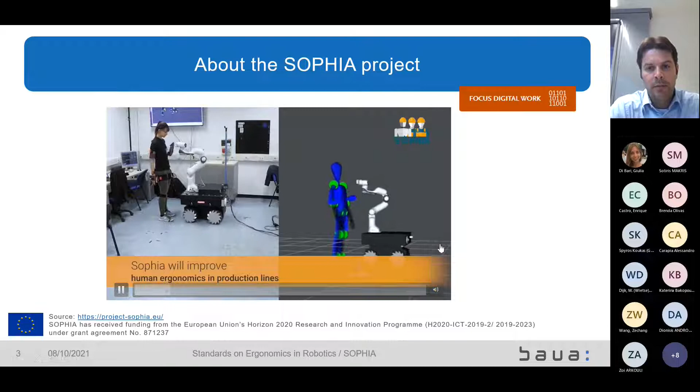I'm not sure, Giulia, can you also hear the sound or not? Yes, we can hear the music.

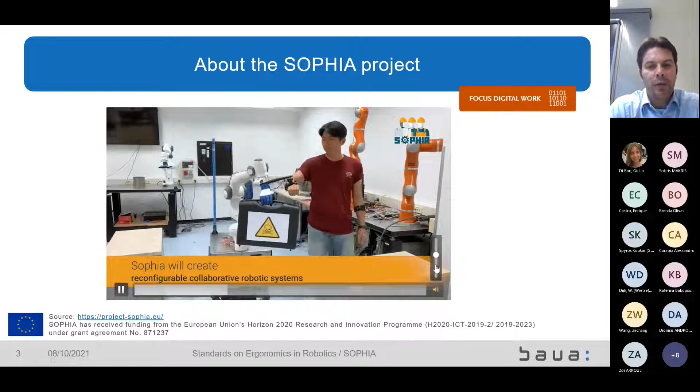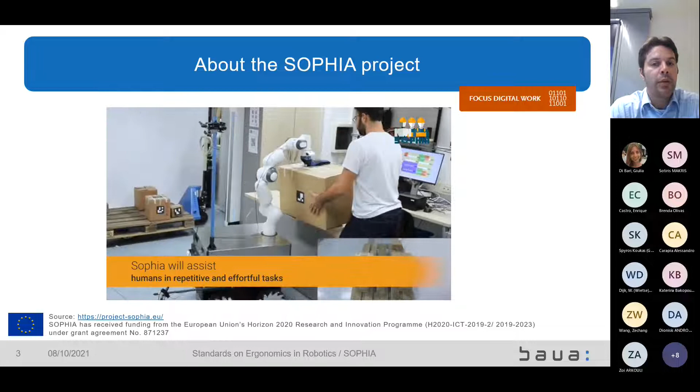So basically what you can see here, we do have collaborative robots - we have collaboration, working at the same time on the workpiece, but also cooperation, not working on the same workpiece at the same time. Here you see one focus of the project. The other focus of the project is on developing exoskeletons, which is something we have started now with several use cases, from the human-robot interaction part.

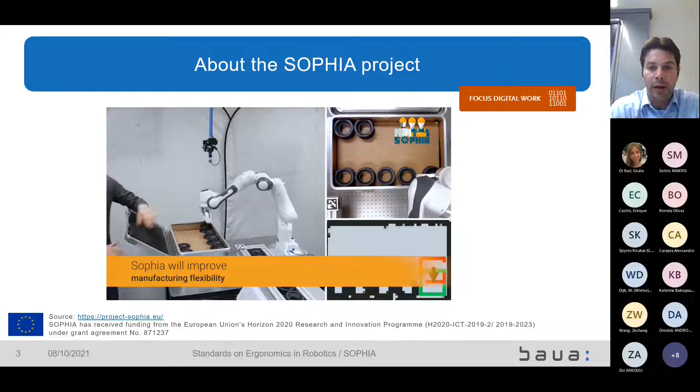As you can see, different aspects we are working on in this field, quite similar to what you are doing in your project. One work package, as you can see here, looks at whether there's any need for updates to standards in the field of ergonomics or workplace safety. So that's just the overview slide.

Who's involved? Here you see all the partners: we have the IIT, the University of Pisa, the University of Brussels, INAIL in Italy, the University of Twente and BAuA as research institutions, and DIN, the German Standardization Institute, for questions of standards. We also have four companies involved: Volkswagen, Hankamp, and Hydria.

They are the manufacturing use cases, and also the company IMK, who's doing human modeling simulation in this field.

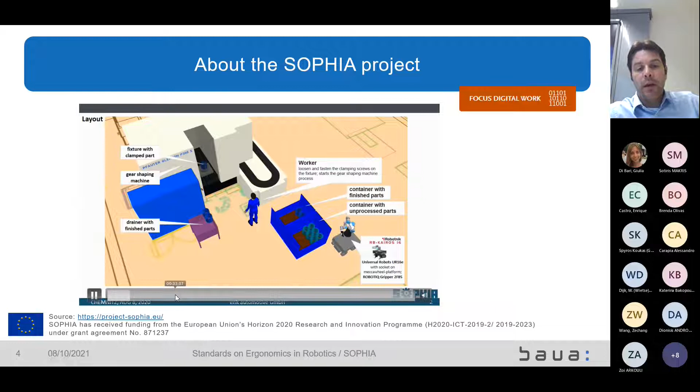What I also brought you is briefly 3 use cases we are working on currently. These are not the only use cases, but just to give you an impression of the systems we are using. As you can see in this simulation, we have a manufacturing environment, a mobile robotic platform, and the classic setting of cooperation.

Basically, the robot is moving the heavy parts to the machine and putting the parts into the machine, and the human is more about adjusting the machine, starting the machine, doing quality inspection, and not doing the heavy lifting of the parts anymore. So this is one use case.

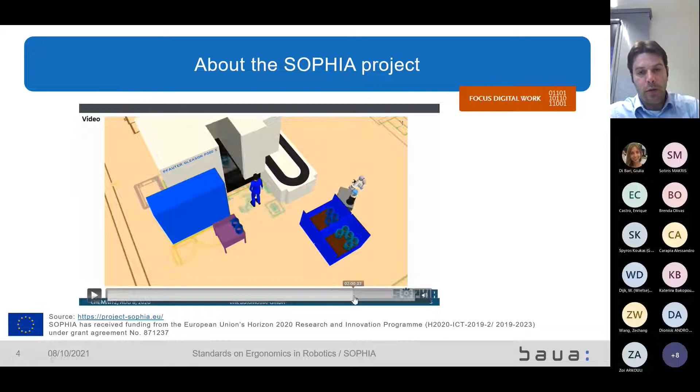What we always do within the project or within the use cases, in the end, is a comparison if using this system helps from an ergonomic point of view, and of course also from a productivity point of view. I don't want to show you the numbers, but if you're interested, I think we uploaded the video to YouTube, so you can take a look at that a little later.

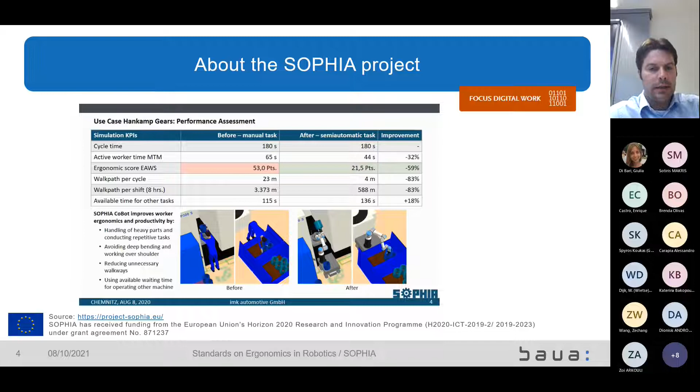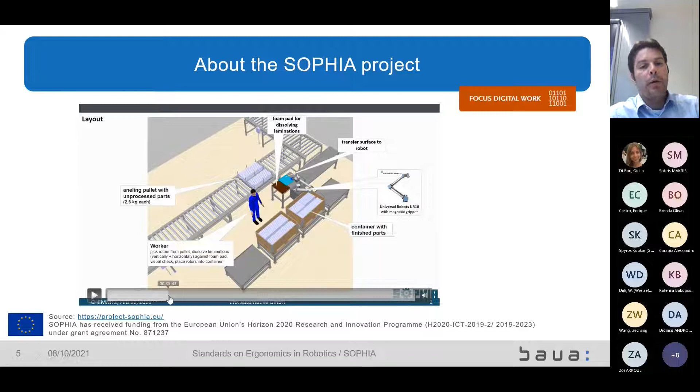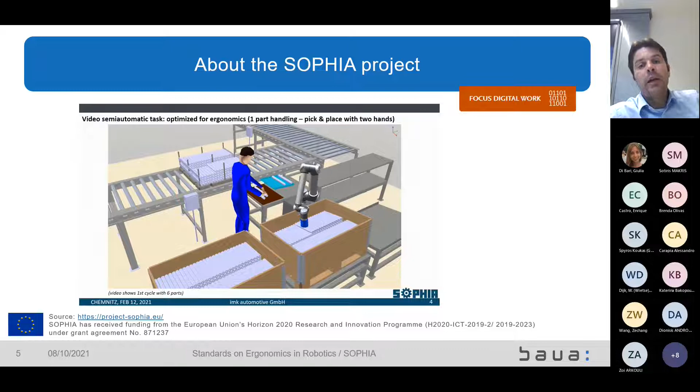One other use case we have here at Hydria - let me just mute that. At Hydria, this is not a mobile platform. This is the process before the human-robot interaction part, and then we have the second version where the human is working together in this hybrid robot system, again not in a collaborative mode, but in a cooperative mode. What I also said before, here we do have the comparison before and after, and what changed due to the implementation of the robotic system.

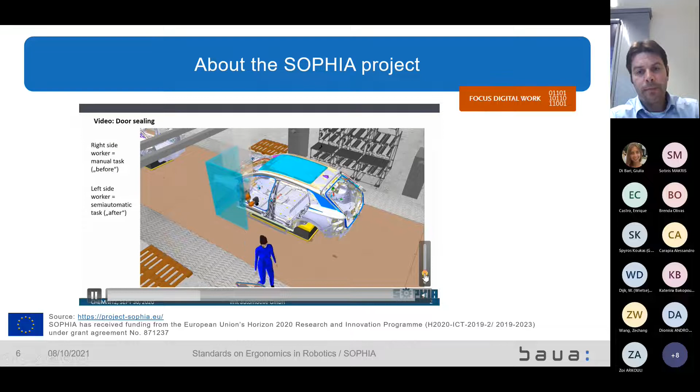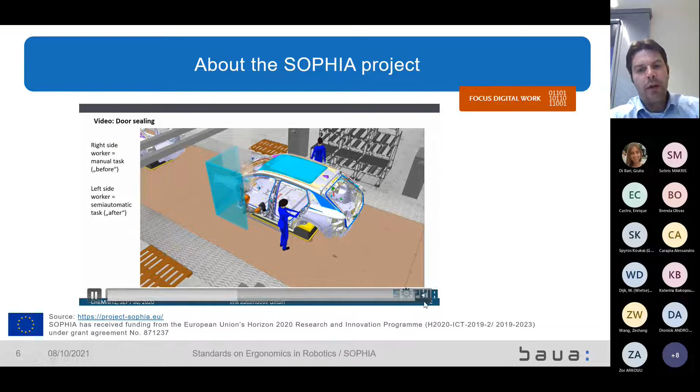We are not only working on robotic systems, we are also working on developing exoskeletons, and on developing methodologies to foster this human-robot interaction. So also for the robotic systems and the exoskeletons, to anticipate the human behavior and support him in a very fluent way, without stopping in the movements, but predicting some of the expectations and movements, so that we have a very smooth collaboration with the mobile robotic system or with the exoskeleton that is used.

So that just to give you an idea about the SOPHIA project.

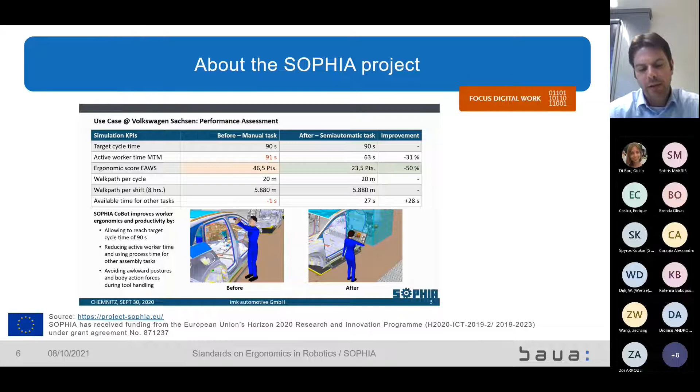Within this project, for us it was also important to take a look at what kind of standards we have, what kind of standards we need to consider, and then also the question of whether there is a need to update the systems and the standards, and what is the update need. I would like to talk first about the standards that are out there on ergonomics in robotics.

Basically what we can say is there are almost no specific human-robot interaction standards on ergonomics, but there are some that are still valid. They are not just limited to robotic systems, but also to machinery in general.

Let me just quickly take a look here, because what I didn't bring you today, since you already had the workshop: today I'm not talking about the safety requirement standards, the ISO 10218 part 1 and part 2. I'm not going to talk about the safety requirements for personal care robots, the ISO 13482. I'm not talking about the ISO specification 15066 on collaborative robotic devices. These are mainly safety standards, so that's why I'm not talking about them in my presentation.

What I want to focus on is specific ergonomic standards, and here you see from my point of view, some standards we have identified, among others, for the SOPHIA project.

Of course, we have to talk about the European and international standard on ergonomic principles in the design of work systems, because these are general principles to follow when you design a work system, no matter if you're using a robot or not. These are very comprehensive and very broad recommendations, but this is something to follow.

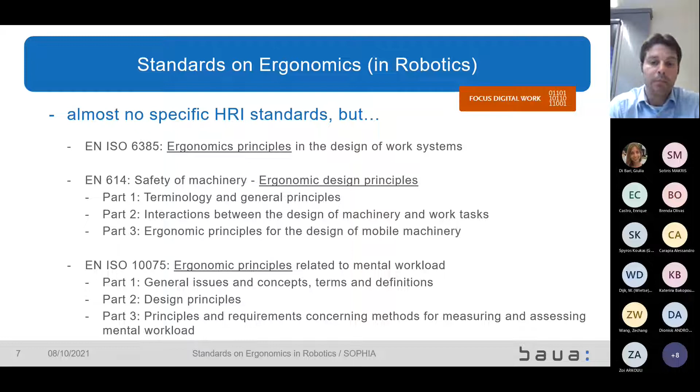What's also important is ISO 10075, the ergonomic principles related to mental workload. There we find design principles and principles on how to measure that - do I have repetitive movements, is that straining, do I have information overload when working with different systems? This might also be relevant if you design a human-robot interaction system.

It gets a little tricky. I don't know if in ROSSINI you also develop exoskeletons, because if you design systems with a robotic system, if it's in the cooperation or collaboration mode, or if it's supporting the lifting, you might still be able to use these kinds of standards for your evaluation. But if you have exoskeletons, it gets really tricky because the exoskeleton gets attached to a human body, and most of the systems we currently use to do physical ergonomic assessment weren't created to be used together with exoskeletons.

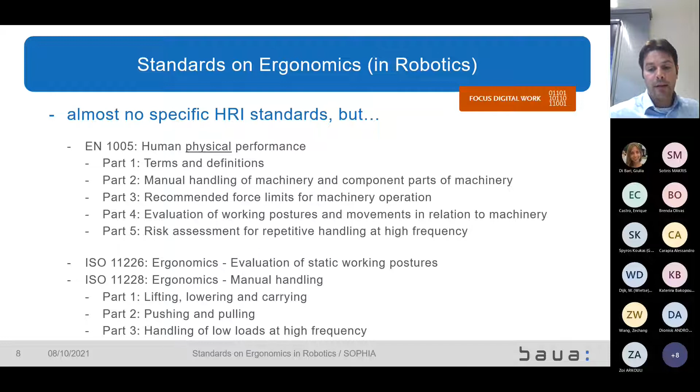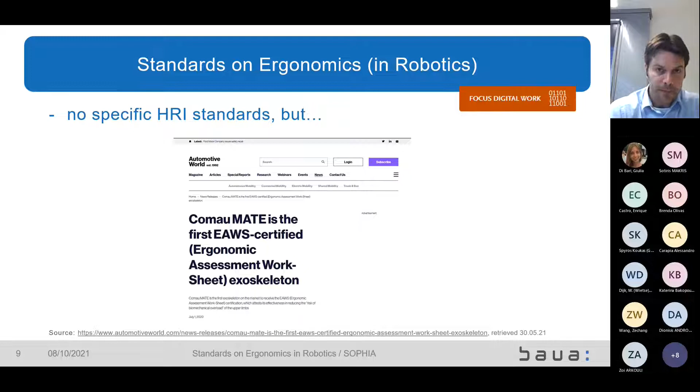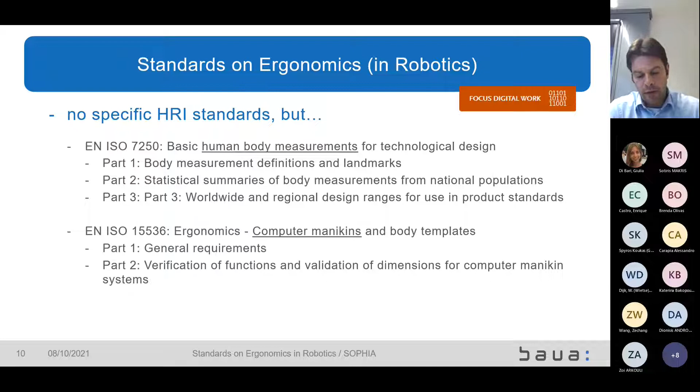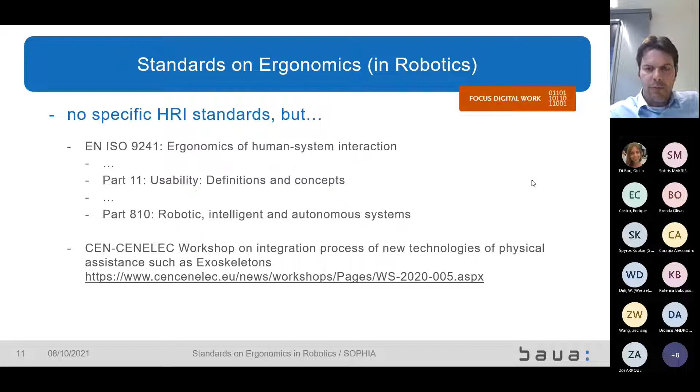Before I come to the end, I also brought an example of how we use the ISO 9241 Part 11 standard within SOPHIA, because here you see the different dialogue principles for interaction with the technical system. Something like controllability, for example, so that the human is in control and can control every movement of the machine. Also very important is conformity to user expectations.

What we've done here is for the three use cases I presented earlier, we asked the users in advance what they expect from the system, what is very important to them. Of course, it's always difficult to give all dialogue principles the same priority, and to see what to focus your attention on a little more—although that doesn't mean you can forget about the other ones—but still here you can see slight differences.

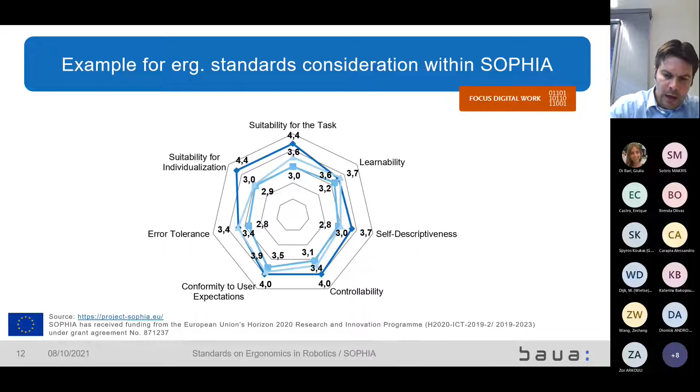Two last slides I brought. If you want to participate in standardization, or want a link to the committees, here I brought the link to the committees in ergonomics. Here you see the different committees—on general ergonomics, and on the physical part, anthropometry and biomechanics.

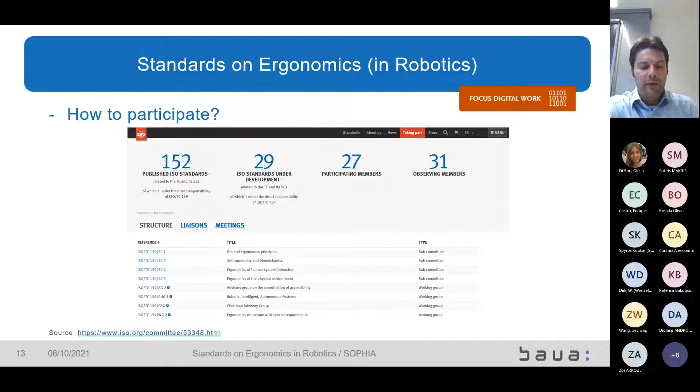Especially one on human-system interaction. So if you'd like to participate, there you'll find more information at the ISO level, next to the national levels you always have in your countries.

My last slide is, as Giulia also said, I'm with the International Ergonomics Association. Currently I'm chair of the Technical Committee on Human Factors in Robotics. Right now it's basically a LinkedIn group, so if you'd like to connect with other people in the field of human factors in robotics, feel free to go to LinkedIn and I'll add you to the group.

We're trying to foster exchange with other institutes like IEEE, the Human Factors and Ergonomics Societies, and ISO, basically to create a group of people strongly engaged in this field. This year we supported the triennial Congress of the IEA by delivering a human factors in robotics track, and we're working closely with IEEE and ARSO, the Conference on Advanced Robotics and its Social Impacts. I think it will be next year in the US, and we're trying to get it to Europe in 2023.

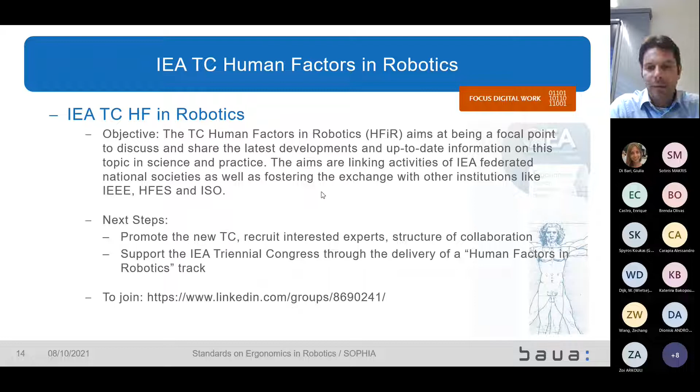So if that's of interest, I kindly invite you to join the group. With that said, I didn't use the full 30 minutes, so I made up some time. I hope it wasn't too fast, and I hope it was a little interesting. Thank you for your kind attention, and happy to take questions now or later. Thank you very much.

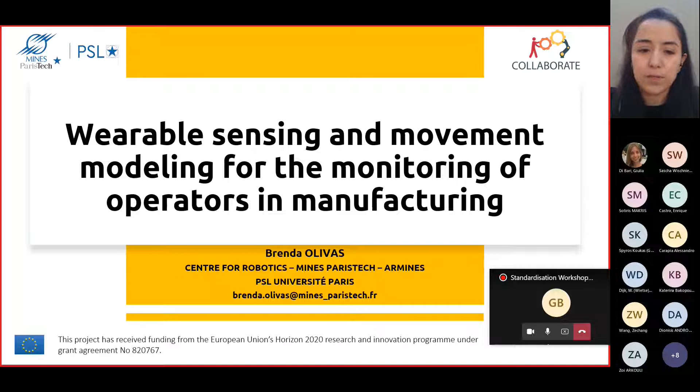Here is an outline that I prepared. First, I will give you some introduction on how we based our hypothesis, how we gathered the data collection for the Collaborate project, the methodology, experiments, an ergonomic analysis platform we developed where we implemented our data-driven framework for this project, and also some conclusions and future work.

First of all, an introduction about what work-related musculoskeletal disorders are. We try to follow specific standard methods. We have found that workers can assume awkward postures, exert high forces, and sometimes be exposed to vibration. In the long term, this can develop into musculoskeletal disorders.

So from our point of view, we wanted to track these risk factors in the workers by using sensors, in our case wearable sensors, or also computer vision, to keep track of these workers and be able to identify these problems.

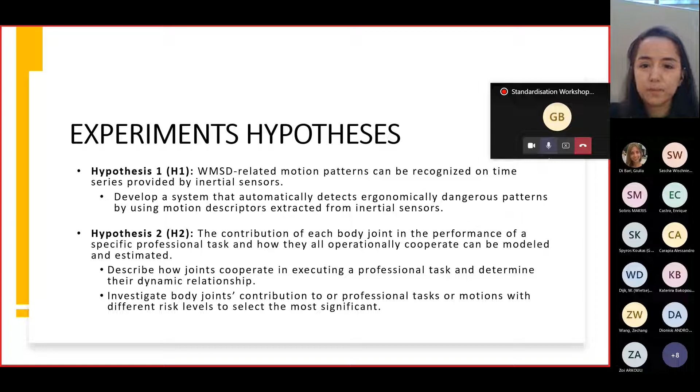We followed a common, simple methodology. First, data collection: we recorded data from different partners in the Collaborate Project, and I'll show you the data sets. We did statistical analysis to determine which motion descriptors to use, such as joint angles, joint positions, kinematics, or torques. We also focused on reducing the quantity of information needed, because to track workers in a factory, we require minimal sensors placed on the worker so as not to be invasive, or to possibly use cameras instead.

So we had to research which technology is most appropriate to record humans. The next step is developing a method for human motion modeling, then applying this method for ergonomic analysis - can we recognize dangerous patterns in the modeled data, or forecast what the person is going to do? If a predicted movement could be considered dangerous, we can define confidence intervals for safe ranges, so that when a person performs a movement that falls into a risky posture or action, we can do risk prevention. We want to implement all this analysis in an ergonomic feedback module usable in companies and factories, in different types of scenarios.

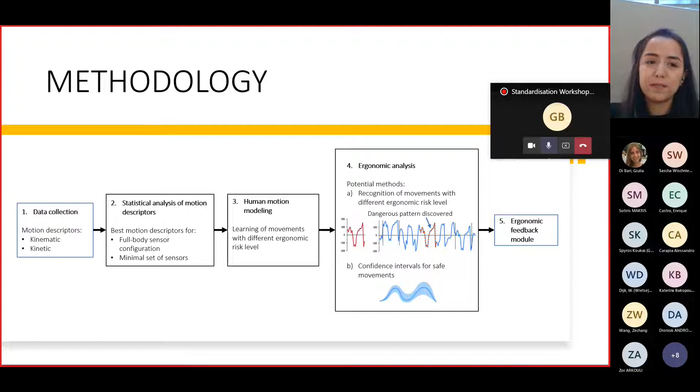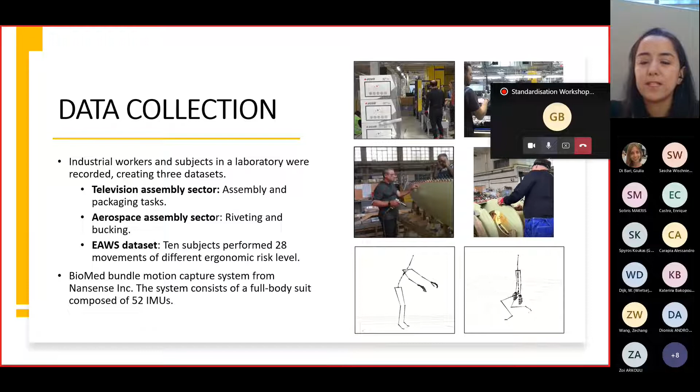To start, we did data collection. For Collaborate, we recorded data from the television assembly sector and the aerospace assembly sector, and also created our own data set where 10 subjects performed 28 different movements at different ergonomic risk levels. This risk level was computed based on the ergonomic assessment worksheet mentioned previously, because it's straightforward to follow and considers how different postures of the legs or body parts affect performance and increase risk and strain.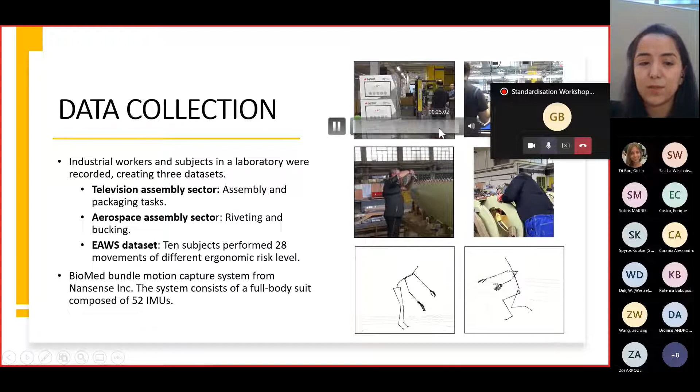For these recordings, we used motion capture technology from Nansense, a model called BioMed bundle, which is a suit. For example, in the first image, the person carrying TVs is wearing an inertial suit with 52 sensors, and we recorded the different activities of these workers to track their movements.

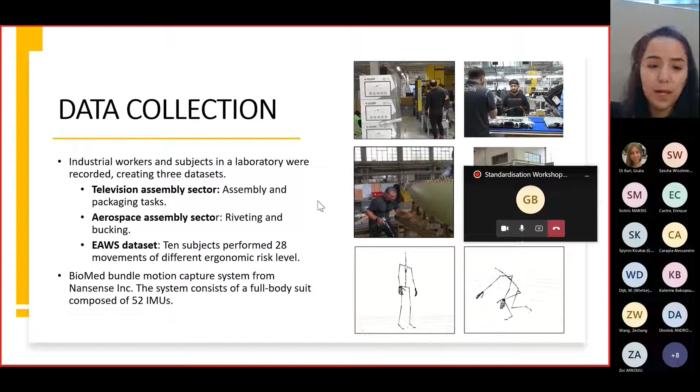For this experiment, I'll present 3 experiments quickly about what we've done so far to extract information. Initially, we wanted to identify which sensors tell us more about the movements we're tracking. So we did principal component analysis and statistical methods to estimate which joints from the whole suit could be most meaningful to monitor in order to estimate the level of ergonomic risk of the dangerous patterns workers perform.

We did component analysis, and from the 52 sensors tracked on the person, we estimated that only 4 sensors could be useful to identify between the different movements performed during a work shift, and also useful to track the postures of the person, allowing us to estimate ergonomic risk according to the posture and movement being performed. In our next experiments, we tried to reduce the sensors further, using only sensors placed on the hips and the right forearm of the person.

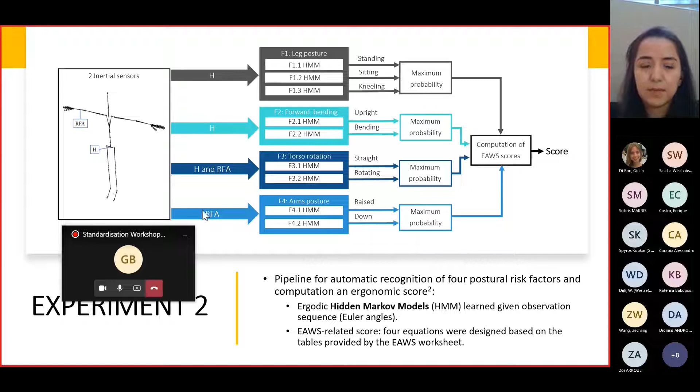We have done this particular experiment for TV assembly. In this data set, these methods have been used. For example, in this video you see at the top right, we tracked and decided to have a collaborator move this person over here, because we estimated it was riskier for him to perform that posture than for the person who is drilling.

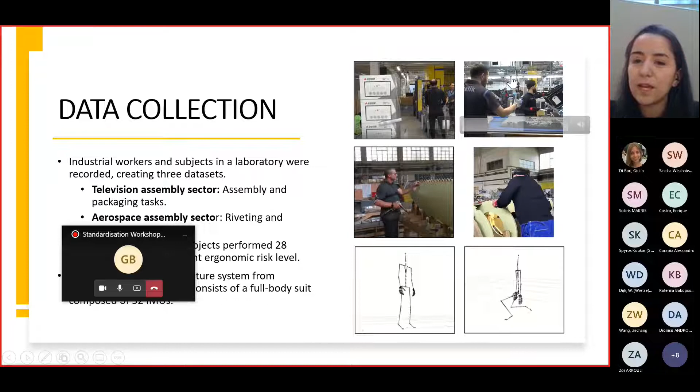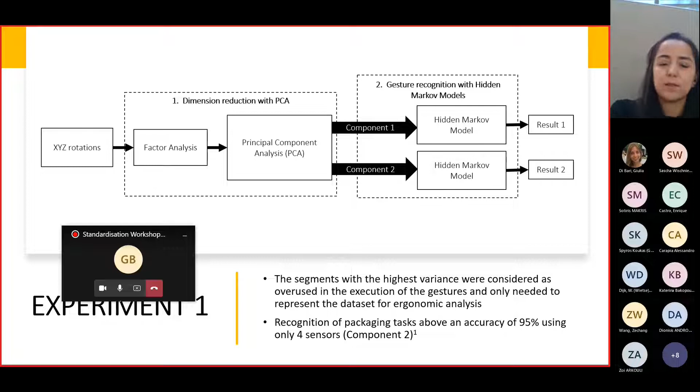With this framework we can estimate who has the highest risk or performs the most awkward postures or most dangerous movements, and who should maybe be helped by a robot, or removed entirely from grabbing boards and have a robot do that instead, so the robot can help the person doing the drilling. With this framework we wanted to track which parts of the whole task are the most dangerous.

Our next work is about risk prevention, or forecasting of human movements. In experiment 3, one of our hypotheses was to estimate the contribution of different body joints and also do some risk prevention. We developed a system, our framework, called the gesture operational model. This is a set of simultaneous equations we use to forecast the future posture of a person during a specific activity.

Why did we want to do that? With these equations we can forecast what the person is going to do in the next second or two seconds, and then estimate, according to his previous movements, whether he is later going to assume a very awkward posture or a very uncomfortable movement, according to what the model forecasts.

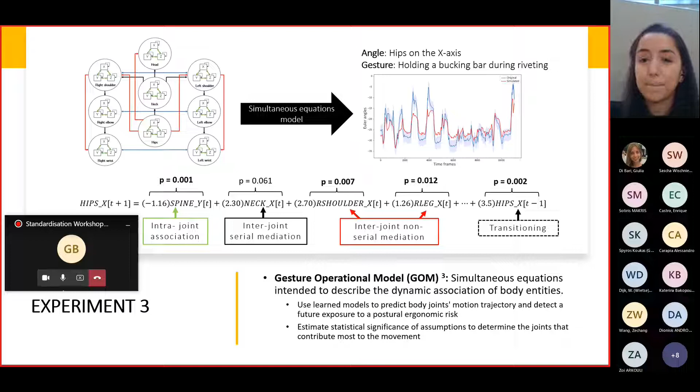With the help of this model, we can also estimate which joints are the most important in a particular movement. For example, if the person is moving his hips a lot, our model, according to statistical analysis, can help us estimate that the hips move the most in these particular actions. So there is a necessity to help this person not perform very repetitive hip actions, because long term this could develop musculoskeletal disorders.

All these methods that I have explained for risk prevention and forecasting human motion, we planned to implement on an ergonomic analysis platform so that ergonomists or managers could use it.

Firstly, we created a very simple application where we applied, for example, the Rapid Upper Limb Assessment (RULA), which measures ergonomic risks according to upper body posture using mock-up data. We recorded data and could see the whole motion of the person and the ergonomic scores for every posture in the motion.

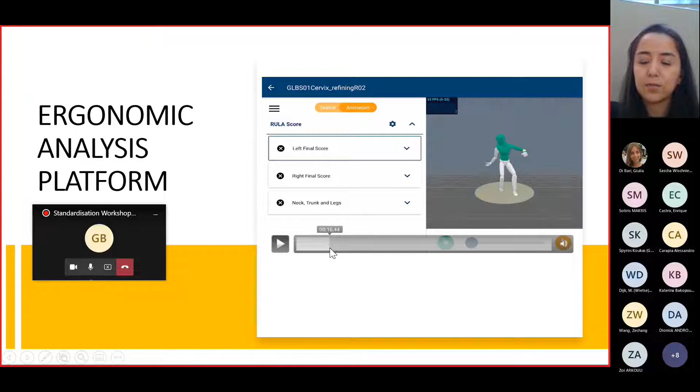Later, we wanted to improve this platform into an application that would handle all different movements. The plan is that the person will be able to upload the motion data they recorded with the inertial sensors, and then use this application to visualize the whole task.

For example, here we have a data set where we tracked a person doing glass blowing, and we can estimate how uncomfortable the postures are by visualizing them. For example, the posture of the torso was yellow, because it's not supposed to be the most uncomfortable position. This is only for RULA.

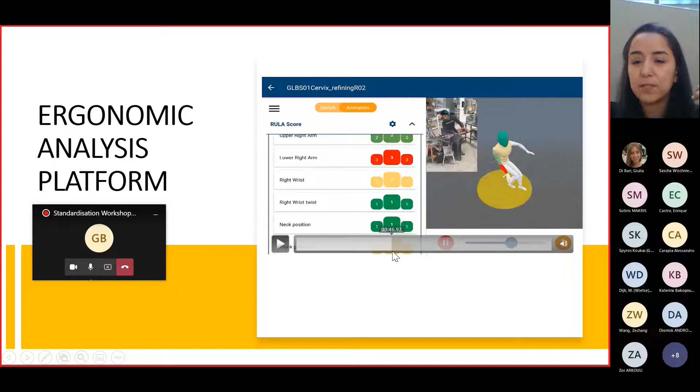This is a very initial visualization of the application. Later we plan to add more toolboxes to increase the analysis of the movement the workers are doing. But here's a very simple visualization, with some adjustments.

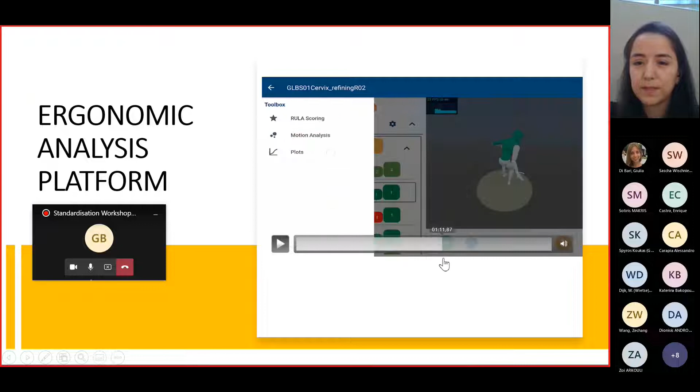For example, if the person is doing these activities repeatedly, or if there's a force or something the person is carrying, we can define it in the settings. So we can track, for example, if the person is carrying a box of 10 kilograms, we can define it here in order to recompute the scores or all the ergonomic analysis or predictions we are doing.

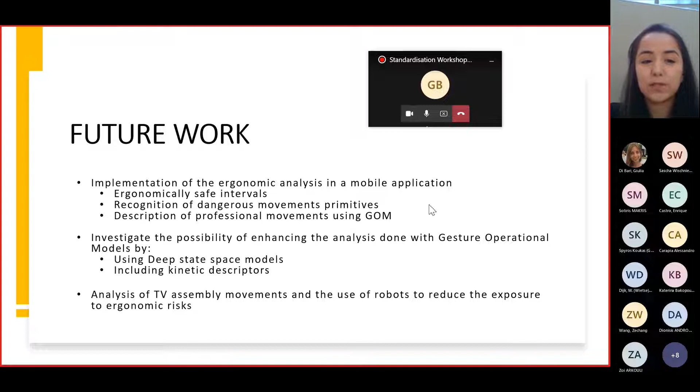Just for ending, for future work, we want to implement this ergonomic analysis in our mobile application, so the person can use it with these inertial sensors and do their own mocap recording and apply it in this application.

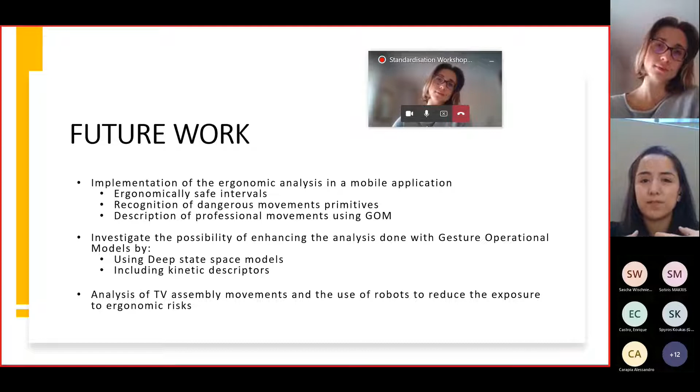We want to investigate deep learning further for forecasting human movements, and also include kinetic descriptors such as joint torques, because joint torque could tell us a lot about the strain on the person, instead of only assuming postures. Torques can also tell us more if the person is carrying boxes, if there's a force, or vibrations. We want to include these kinetic descriptors instead of only joint angles or joint positions, which are kinematic descriptors.

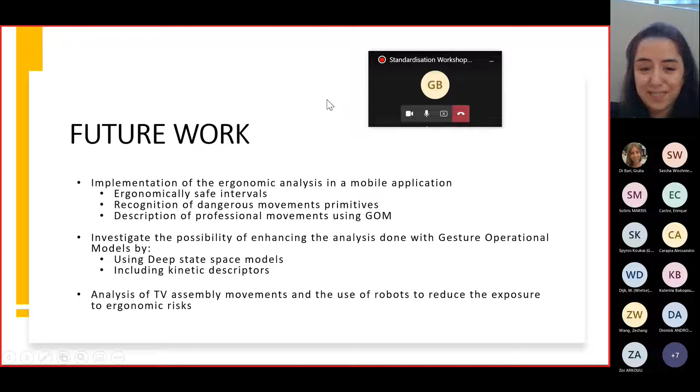Next, we want to use the information from this ergonomic analysis on the data sets we recorded. It is in progress for us to substitute the most dangerous movements that we tracked with our frameworks and assign them to a robot, so a person can collaborate with it, and the most dangerous movement will be assigned to this robot.

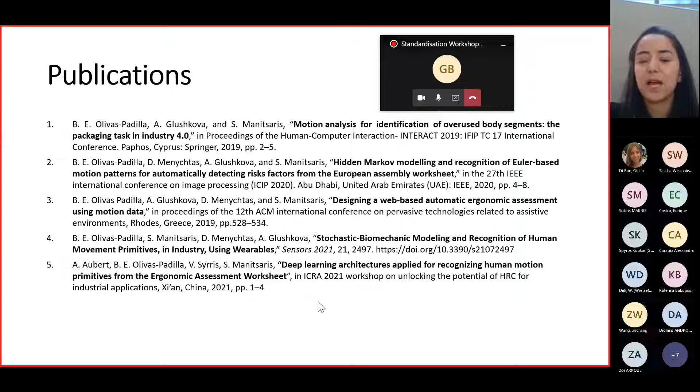So, here are mostly the publications, because I did a very summarized version of the methods I have discussed. We have these papers here where you can find more detailed information on how we proceeded with this ergonomic analysis, tracking, and the data-driven frameworks we developed. That will be all for me.

Thank you, Brenda. Thank you very much for your presentation.

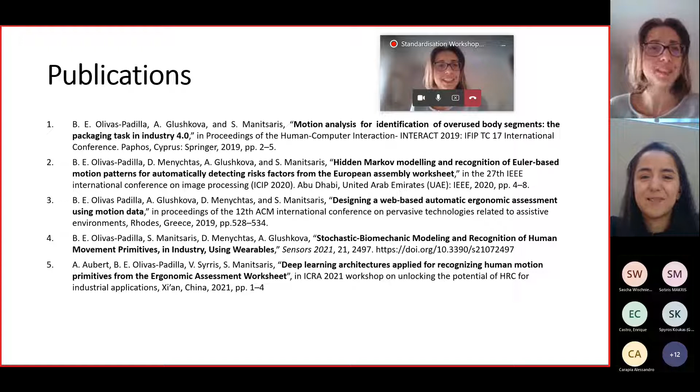Now I leave the floor to Frank Krause from TNO. Frank is going to present the latest activities carried out by him in the ROSSINI project. So Frank, when you want, you can share your screen.

Okay, I'll share my screen. Wait a second.

First of all, I'm not an engineer, I'm an ergonomist, and these two types of people might approach standards in a different way, but I'll get to that later.